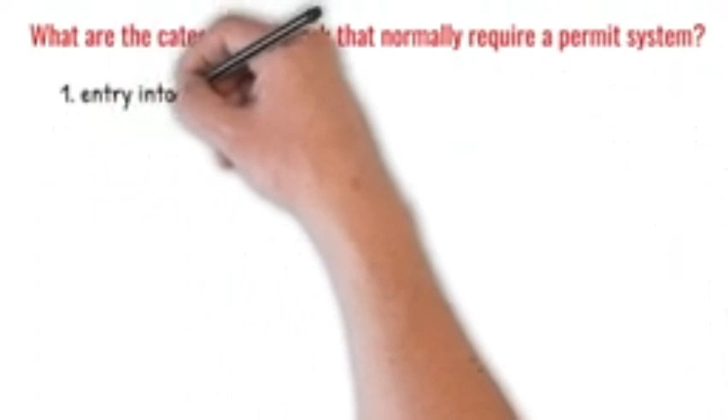6. General electrical, under 1,000 volts. 7. Electrical high voltage, over 1,000 volts. 8. Working on deck during adverse weather. And 9. Lifts, lift trunks, and machinery. The list is not exhaustive. There may be other categories that may require a permit.

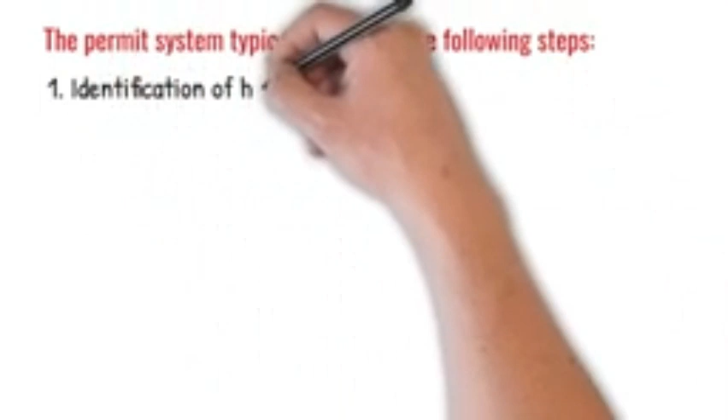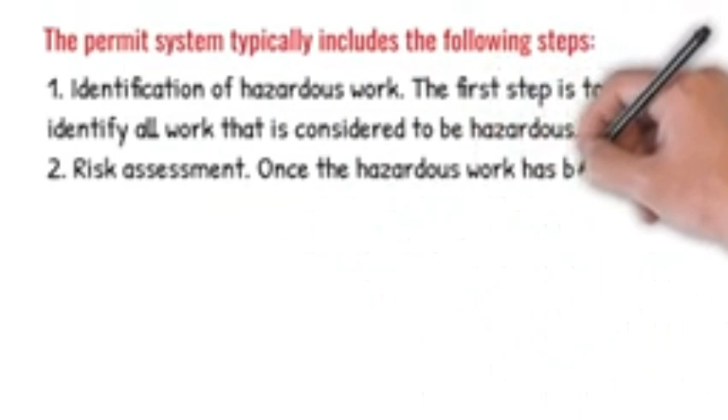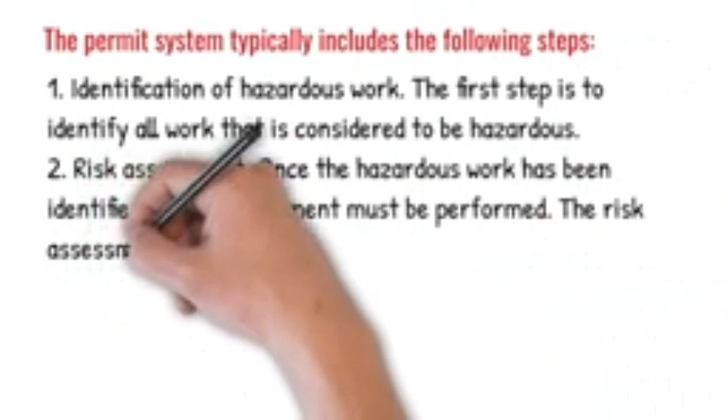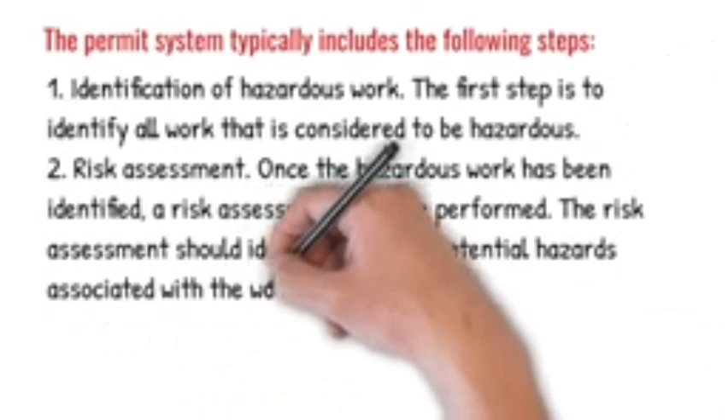The permit system typically includes the following steps. 1. Identification of hazardous work. The first step is to identify all work that is considered to be hazardous. 2. Risk assessment. Once the hazardous work has been identified, a risk assessment must be performed. The risk assessment should identify all of the potential hazards associated with the work and assess the likelihood and severity of each hazard.

3. Development of safety procedures. Based on the results of the risk assessment, safety procedures must be developed for the hazardous work. The safety procedures should specify the specific safety precautions that must be taken to mitigate the identified hazards.

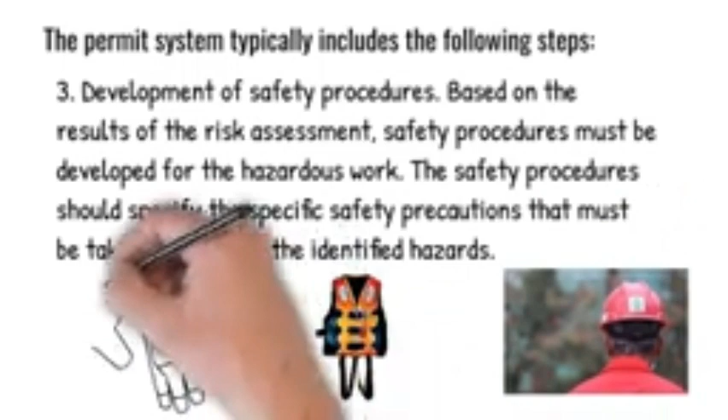4. Issuance of a permit. Once the safety procedures have been developed, a permit must be issued for the hazardous work. The permit should specify the specific work that is authorized, the safety procedures that must be followed, and the duration of the permit.

5. Supervision of the work. The work must be supervised by a qualified person to ensure that the safety procedures are being followed.

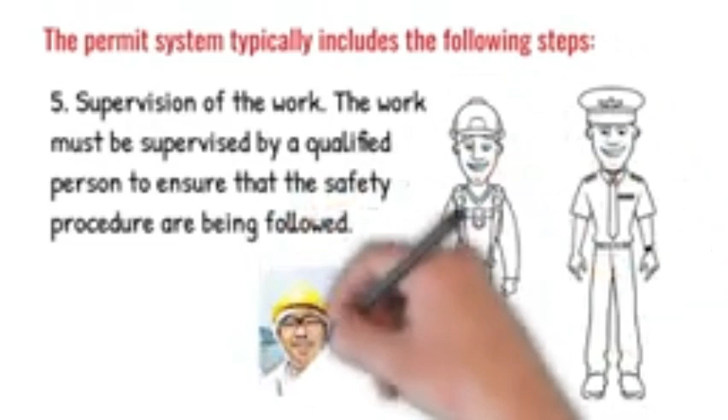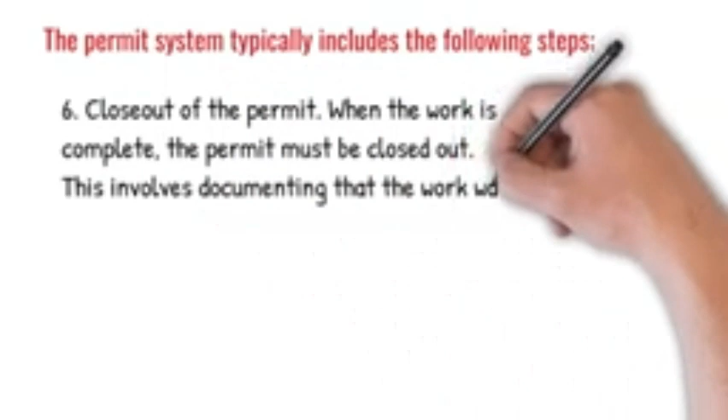6. Close out of the permit. When the work is complete, the permit must be closed out. This involves documenting that the work was completed safely and that all of the safety precautions were followed.

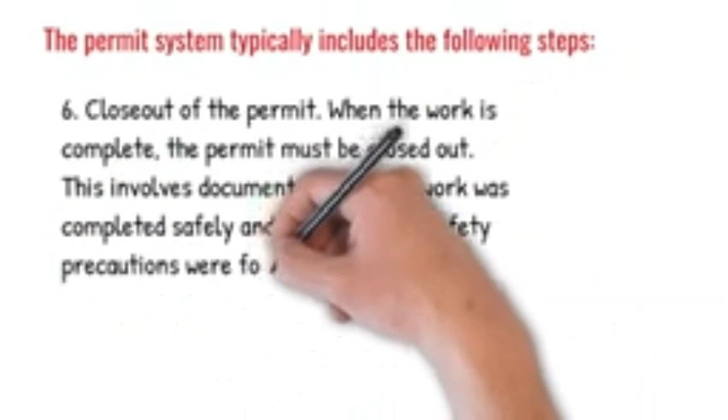The permit system is an important part of the shipboard safety management system, SMS. It helps to ensure that hazardous work is performed safely and that all potential hazards are identified and mitigated.

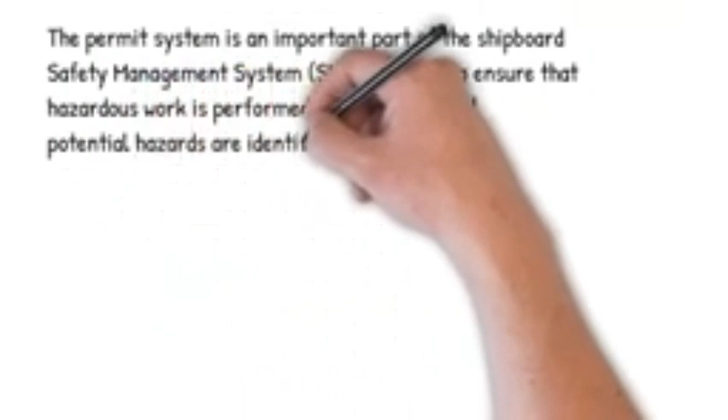If you are working on a ship, it is important to be familiar with the permit system and to follow the safety procedures that are specified in the permit. This will help to ensure that you work safely and avoid accidents or injuries.

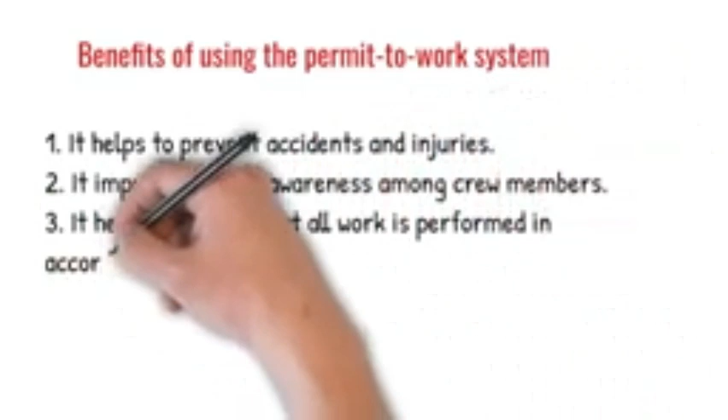Benefits of using the Permit to Work system. 1. It helps to prevent accidents and injuries. 2. It improves safety awareness among crew members. 3. It helps to ensure that all work is performed in accordance with safety regulations. 4. It can help to reduce insurance premiums.

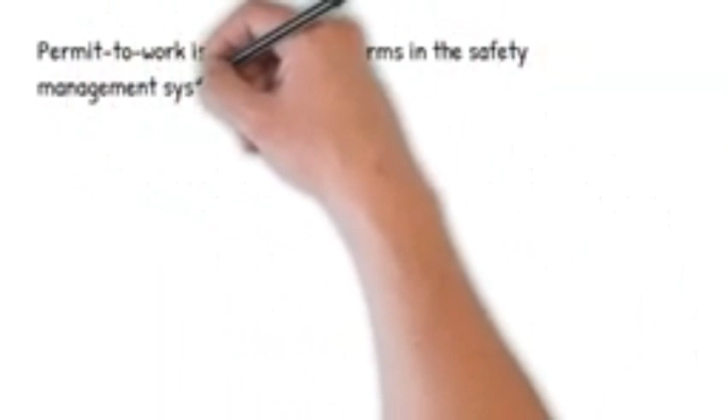Permit to Work is already in the forms in the safety management system. And it also includes the safety checklist and necessary precautions to follow in conducting the hazardous work. It must be prepared prior to doing the work and must be signed by the master.

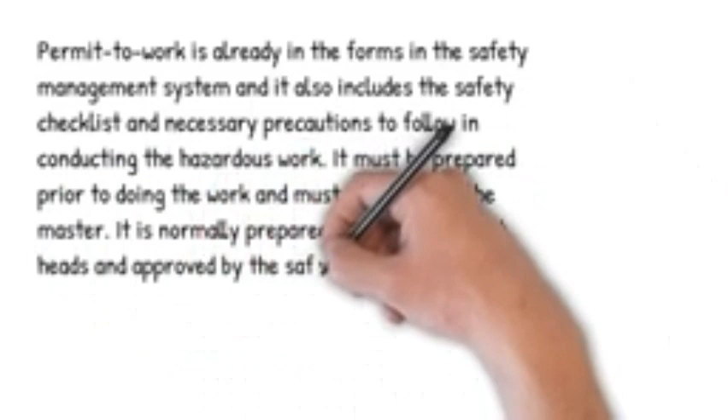It is normally prepared by the department heads and approved by the safety officer or the master depending on what is written on the SMS. Some companies also require the crew involved in the work to sign the document.

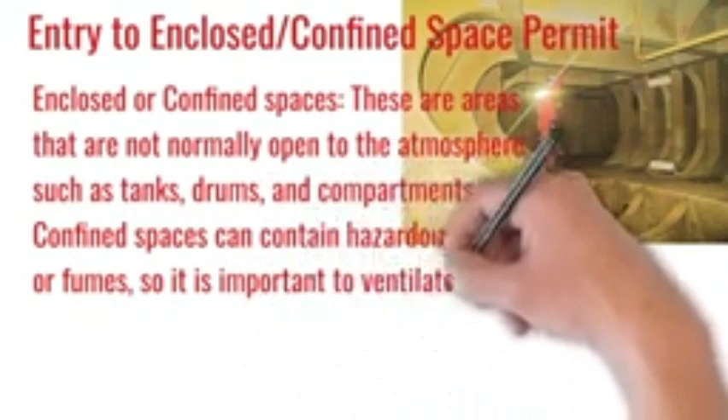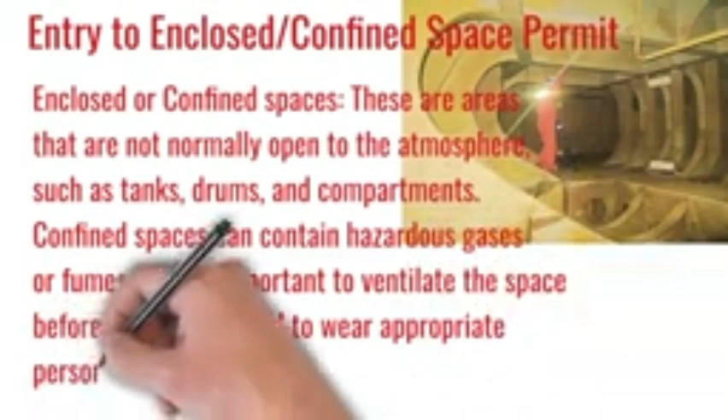Entry to enclosed confined space permit. Enclosed or confined spaces: these are areas that are not normally open to the atmosphere, such as tanks, drums, and compartments. Confined spaces can contain hazardous gases or fumes, so it is important to ventilate the space before work begins and to wear appropriate personal protective equipment, PPE.

5 sections of the entry to enclosed space permit. 1. Scope of work must be specified in the forms, such as location, validity, work to be done, and reason for entry. 2. Checklists: risk assessment, toolbox meeting, pre-entry and preparation checklist, breathing apparatus, and additional precautions. 3. Certificate of checks: signatures of the competent person and the authorized officer.

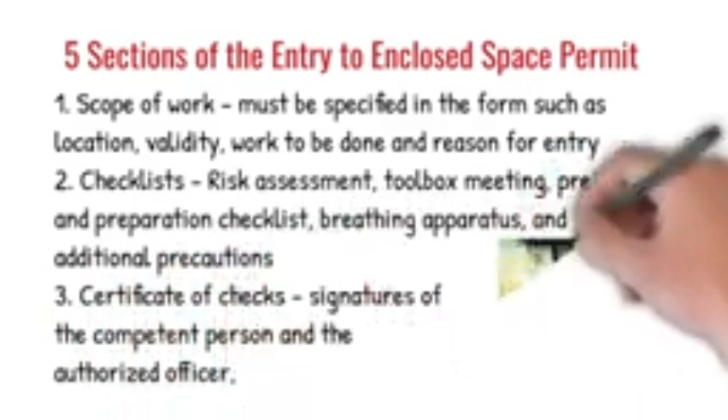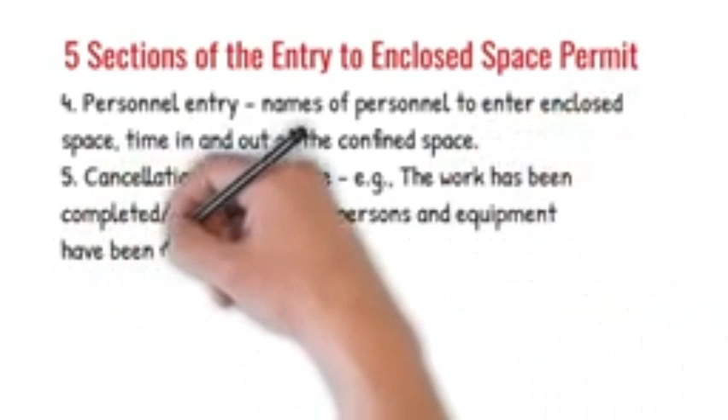4. Personnel entry: names of personnel to enter the enclosed space, and time in and out of the confined space. 5. Cancellation of certificate: for example, the work has been completed or canceled, and all persons and equipment have been withdrawn. The authorized officer must sign and indicate the date and time of completion or cancellation.

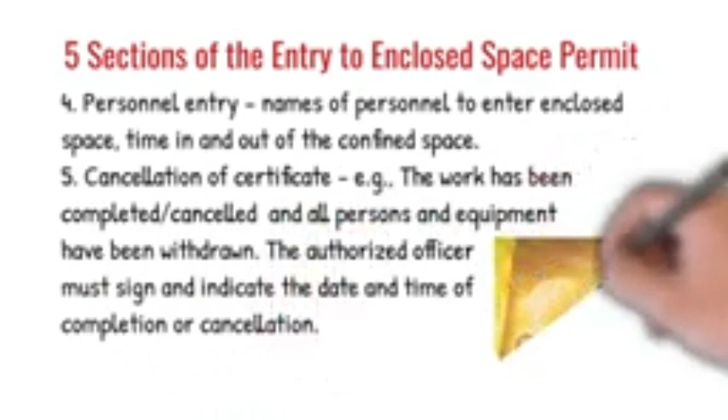Entry into enclosed space pre-entry checklist. 1. Is the space thoroughly ventilated? 2. Is the atmosphere inside tested and found safe? 3. Is the space secured for entry, isolated for safe entry? 4. Is testing equipment available for regular checks? 5. Is the ventilation arranged for the duration of the permit?

6. Is there adequate access and lighting? 7. Is rescue and resuscitation equipment available at the entrance? 8. Is the competent person in attendance at the entrance? 9. Is the OOW advised of the planned entry? 10. Are the communication arrangements agreed? 11. Are the emergency and evacuation procedures agreed?

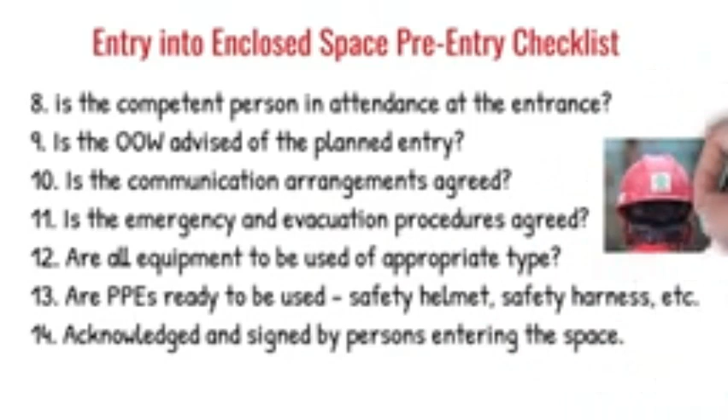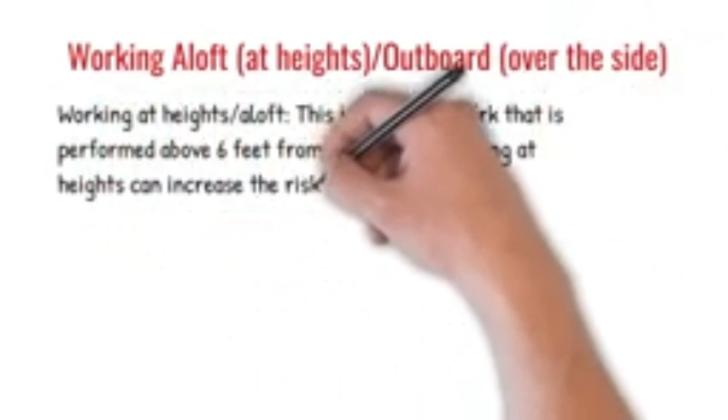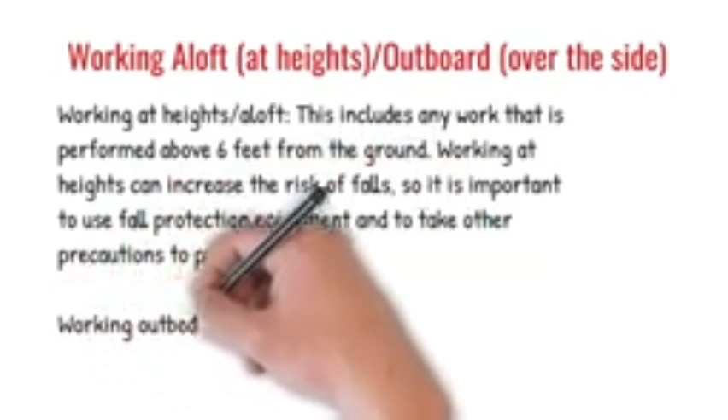Working aloft or working at heights, and working outboard or working over the side. Working at heights or aloft includes any work that is performed above 6 feet from the ground. Working at heights can increase the risk of falls, so it is important to use fall protection equipment and to take other precautions to prevent falls. Working outboard or over the side includes any work over the side of the ship where there is a risk of falling into the water.

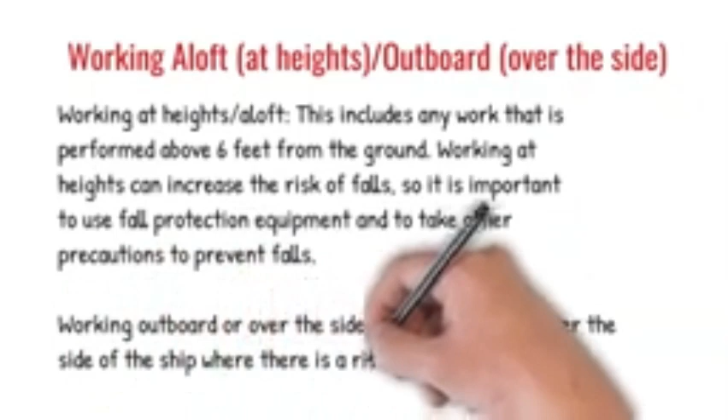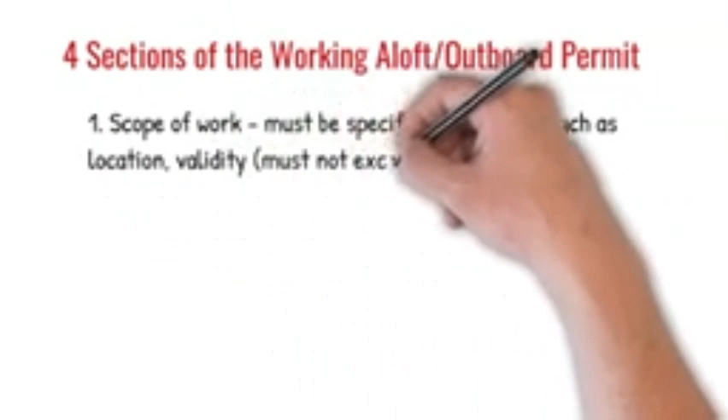Four sections of the Working Aloft Outboard Permit. 1. Scope of work must be specified in the form, such as location, validity, which must not exceed 8 hours, and the work to be done. 2. Checklists: risk assessment, toolbox meeting, preparation checklist, and additional precautions. 3. Certificate of checks: signatures of the competent person and the authorized officer.

4. Cancellation of certificate: for example, the work has been completed or canceled, and all persons and equipment have been withdrawn. The authorized officer must sign and indicate the date and time of completion or cancellation.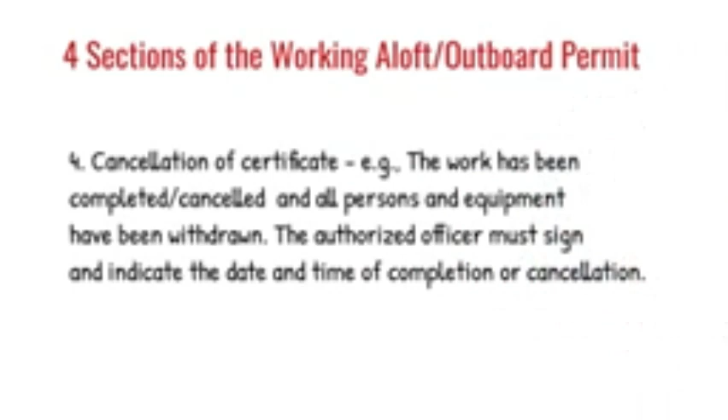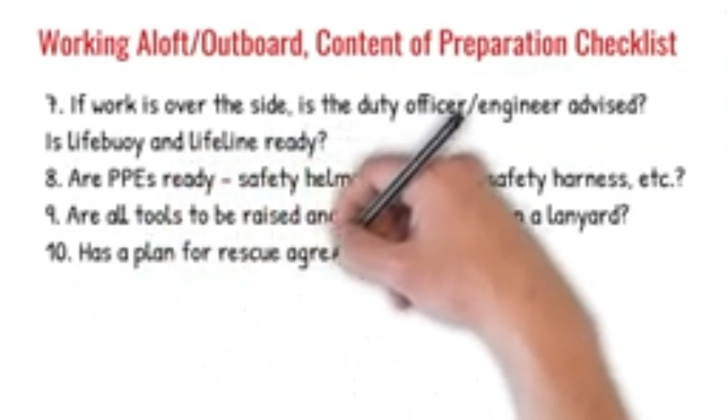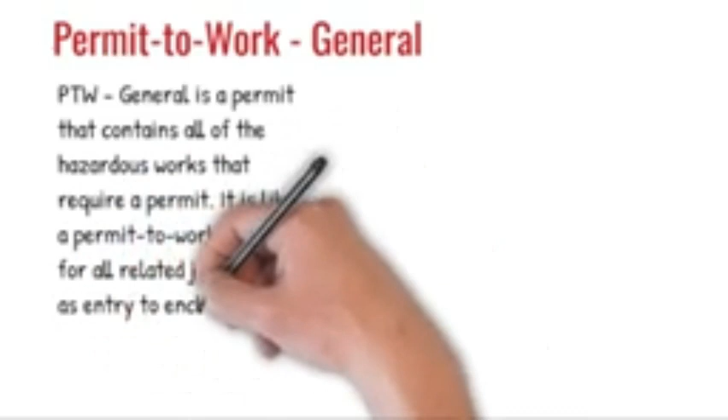Permit to work general. PTW General is a permit that contains all of the hazardous works that require a permit. It is like a permit to work in one for all related jobs, such as entry to enclosed space, hot work, working aloft or outboard, etc.

Hot work. This includes any work that involves welding, cutting, brazing, or soldering. Hot work can create sparks or flames that can ignite flammable materials, so it is important to take special precautions to prevent fires and explosions.

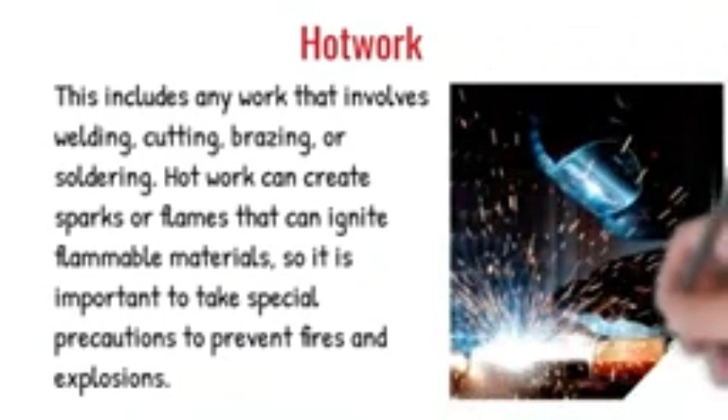Working with hazardous substances. This includes any work that involves chemicals, fuels, or other hazardous materials. Hazardous substances can pose a variety of health hazards, so it is important to follow the appropriate safety procedures when working with them.

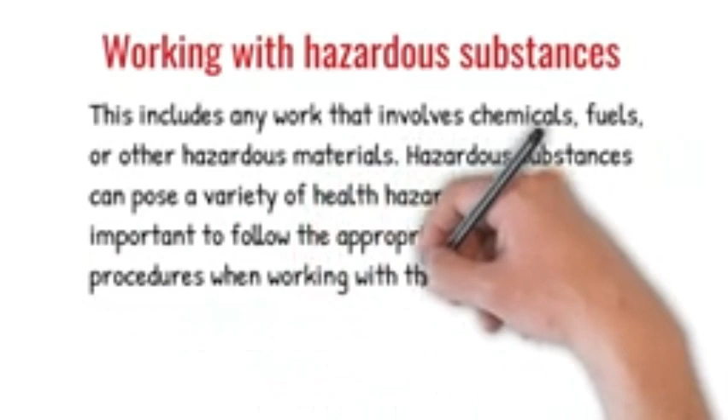Working with machinery. This includes any work that involves moving machinery or equipment. Machinery can pose a variety of hazards, such as crushing, cutting, or electrical shock, so it is important to follow the appropriate safety procedures when working with it.

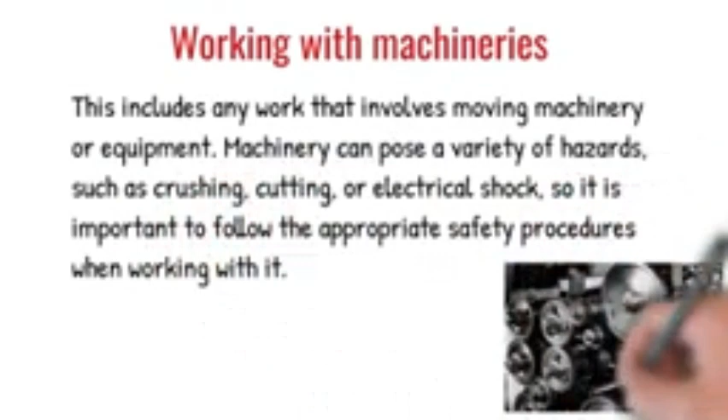Working near energized electrical equipment. This includes any work that is performed near electrical cables or equipment that is energized. Energized electrical equipment can pose a serious shock hazard, so it is important to de-energize the equipment before work begins and to take other precautions to prevent electrical shock.

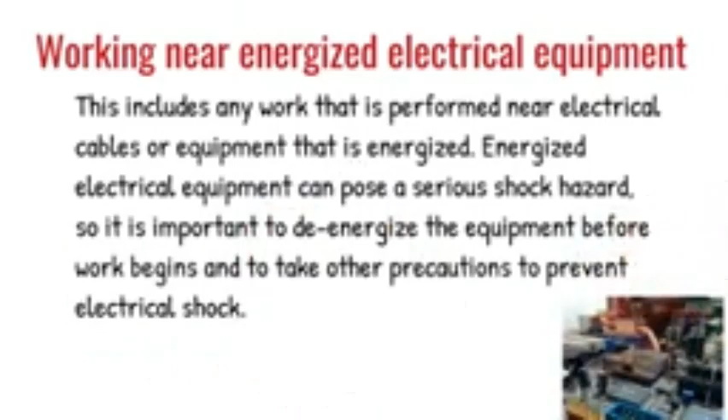The permit to work presented is only an example. Check your safety management system for the different permit to work forms. Always follow the permit to work system. Remember this: the SMS is provided for the safety of the crew. It is your job to follow the contents and be safe. Safety is not an option, but a necessity, so that when you are safe, your family will also be.